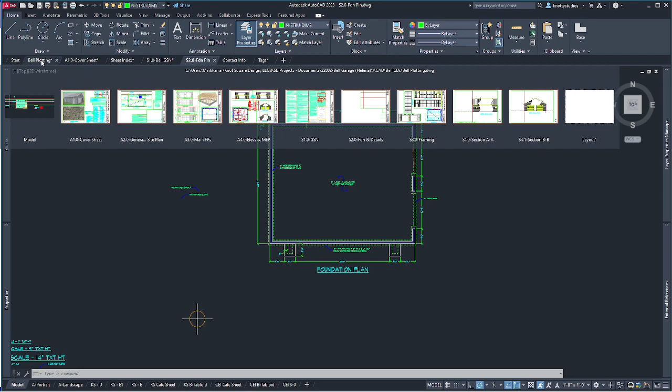Before we do that, I'd previously chosen a name that wasn't very good for this drawing. Instead of it just being called Foundation Plan, I added Foundation Plan and Details, but I separate Details into separate drawings that are then XREF'd into the plotting drawing. So I'm going back to my projects, to this particular project, to my AutoCAD file, then CDs, and did a save as. Now I have Foundation Plan, which is the one we want to keep, and this one called Foundation and Deets is junk, so I'm just going to toss it and clean things up a little.

Office loves to tell me that I'm throwing away stuff.

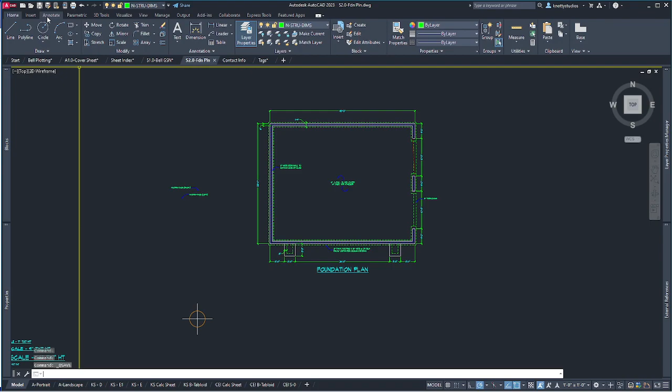So now I've got to get this into this plotting drawing. Before I do anything, let's make sure we save the latest version. Go into plotting. Once we're in plotting, we've got a few different things here, and Foundation and Deets — that's kind of how I came up with the name for the drawing — and that was just a mistake on my part.

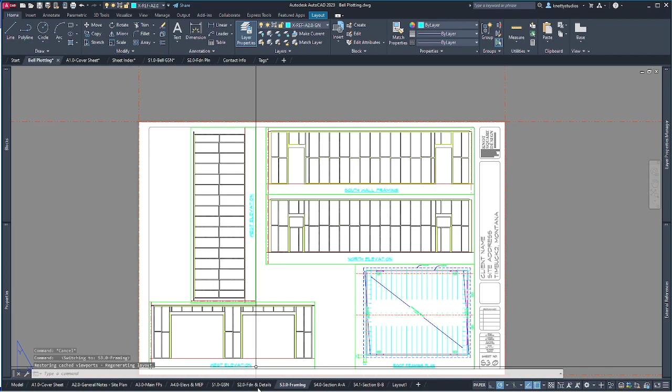We're going to go into that drawing. We already have a framing plan sitting here, but there was plenty of room, so we've got a framing drawing with framing of the walls, and we're going to do some rearranging because on our main floor plan I have those walls much nicer, dimensioned out, everything's ready to go. So the floor plan, three-dimensional image of it, all that kind of stuff is here.

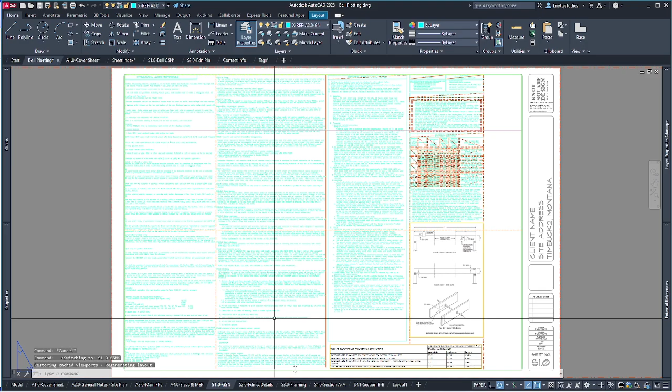Here we'll find out what fits and then start eliminating stuff. Our GSN is full — that's our general structural notes — so that sheet is full.

The way that I do this, I have a block, so to keep my client anonymous — which I didn't in some of my first videos — I changed the name to just leave it blank, and that's just in one drawing, so it'll fix all these in one shot when I'm ready.

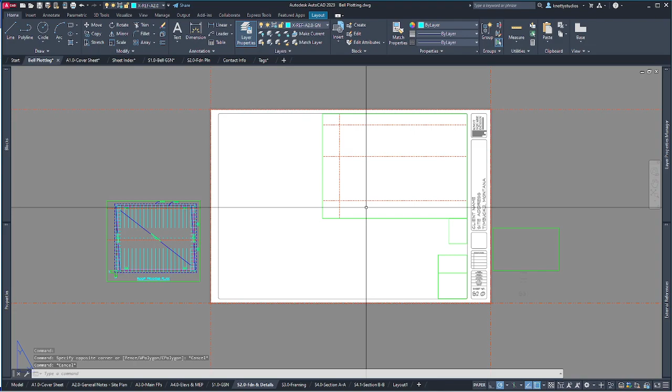So we're on S2, and we need to see what we've got going on for layer sets in this. I'm going to back out. Oh, and I know I haven't imported into this drawing.

Here I've got structural plans, and that plan we're seeing — you can see that blinking to the left there as I go over that line — that is in model space, and we need to put one next to it. That's the foundation plan, so we have to XREF that in.

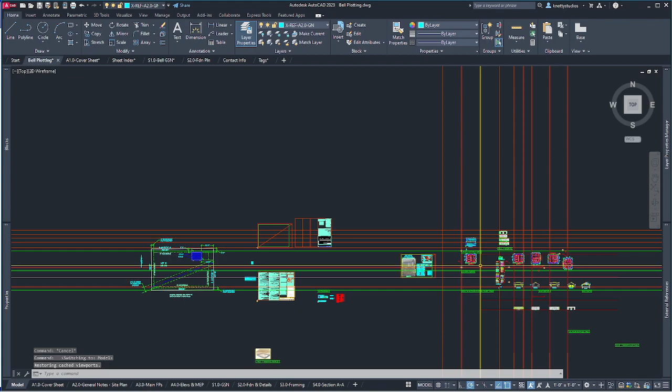First we need to make sure we're on the right layer, go to model space, go over to an area where I keep my structural plans. All these red lines don't print, so they're of no consequence — they just kind of help me line things up.

Let's see what we're on — we're on the general notes. So we want to be on an XREF for the foundation, and that is this guy here. I'm going to type XREF — oops, I didn't quite get it, but it got it anyway. Or no, looks like I did, I just didn't think I hit it.

And then I'm going to add one. Make sure I don't have that S2 in here from that other erroneous one. We should have this Rob.

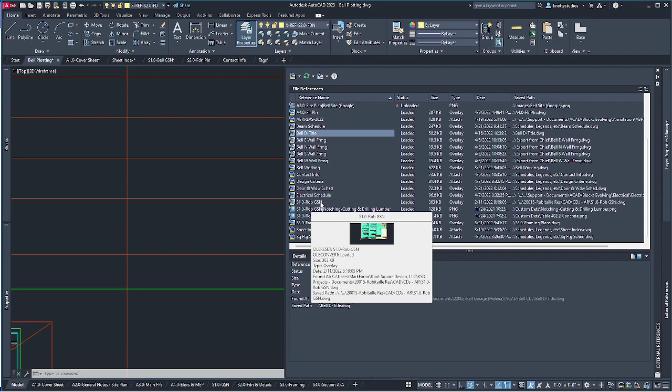That's just a name — I think I explained that in another video — but these are from a previous job, and we'll start using this convention of having the client name in certain types of objects, such as general notes, that sort of thing. Specific to its own, yes, that works fine. That helps me identify that I'm in the right job.

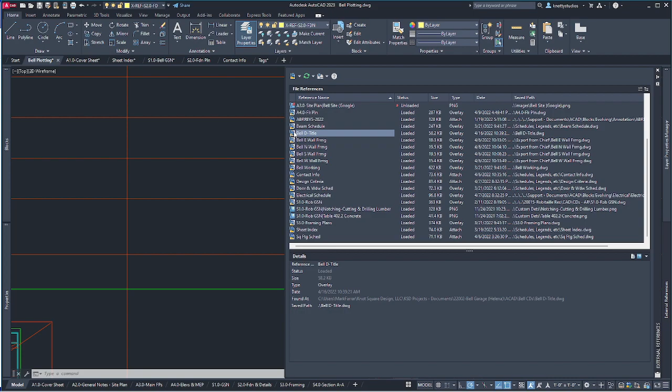So in here I need to attach — I'm on the right layer. All the stuff's going to show up in my other window because I was recording on the other monitor yesterday, but I got some stuff figured out to where I can record on my main monitor now.

So I'm looking for that S2. There it is, open it up. And the scale is good, 1:1. The path is going to be relative. The reference type will be an overlay.

If you do an XREF into an XREF into an XREF, you do need to attach if you want it to show up when you go to plot. But overlays are better for, let's say, when you XREF a drawing into one drawing, and then you XREF that drawing back into the original drawing. The only way you can do that without getting what's called an infinite loop situation is to use the overlay.

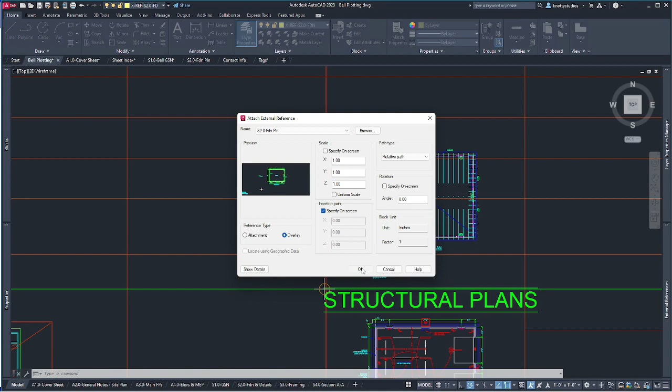My insertion point, I'm just going to pick that on the screen, because 0,0 is going to shoot off into space. And it's 1:1 on scale, inches, rotation angle, all that stuff's good. So here it is, and I'll just drop it in here.

Good enough place, and I've got some extraneous material. This is all part of it, all this stuff way out here.

So to make that go away, I type XC for an X-reference clip, pick the X-reference, go through, space bars because I do want a new boundary. I do want it to be rectangular, and that just sets me in the mode that last clicked.

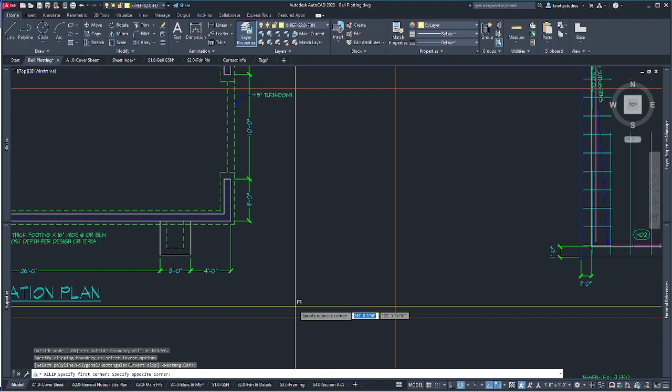So now I can just pick here, come down, make sure—see, I'm snapping over here when I'm getting close. So if I zoom in, so I can see this text up here and be able to tell where I'm at. If I get close enough, it shouldn't snap. Or I could turn my snaps off, but we're going to just get close enough.

And now you can see it's all cleaned up. That's as big as it is. And if I needed to change it, I can actually grab these little guys and resize it.

So now that that's in there, I can go back to this sheet that we were building. I can pan—oh, first I got to get into this viewport. That makes it line thick. Hit pan. That was a double click to get in.

Then bring it over, and it's grabbing that. That's pretty close to centered enough to where I think it's going to work. You can't get out of here unless you get out of pan. And this is just one of those commands in AutoCAD. Oh, it looks like I can go up here, but I'm still stuck in pan.

So you have to escape, get yourself out of pan. Now you can double click out of here, but I don't want to yet because I need to change the scale to 1/4 inch equals 1 foot. So there's my scale, it's going to bring it in.

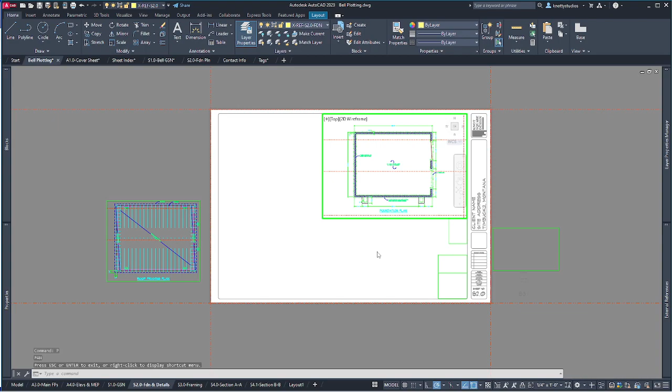Now I can go back to pan again. Let's bring it somewhere towards the middle. That's good enough. Double click out, and now I can size this viewport so that it easily just makes it something I can scooch around on the drawing until I'm happy with the way it lays out with all the other drawings that are going to be on the same sheet.

So there's that. I've got these down here. They probably have different layer settings because you can set layers to print differently in different viewports. So I'm going to keep them because they're probably to do with details. And eventually, as it says, foundation and details—this may end up on a different sheet.

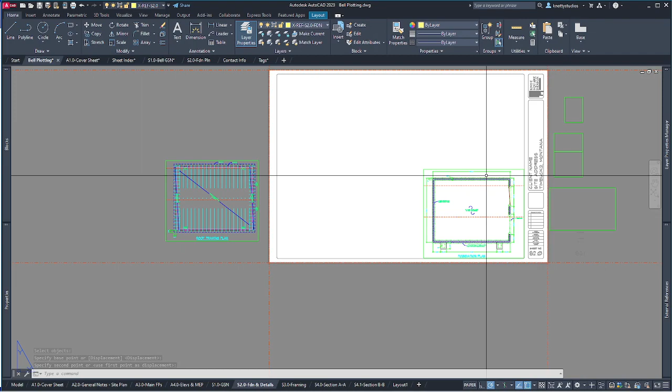We shall see. So now I'm going to move this. I like to move it down towards the right-hand side because this is my staple edge, and this is the important information the contractor wants to see right away. I try and keep it over on this side.

For the moment, I don't see why we don't—there's going to be so few details in this plan. Why don't I stick this up here? And let's get the framing in here too. And maybe we'll just rename this drawing when we're all done. And I'm going to bring it up, separate it a little bit.

So now I have my roof framing. If I want to, I can actually create some lines through here. And I can do it in paper space, or I could do it in model space. I'll show you the difference. So let's go back to model.

And I can even copy one of these lines, or I can create another one. So let's go to the G-LABEL/JUNK. Any of the G layers are just for our reference—they won't print.

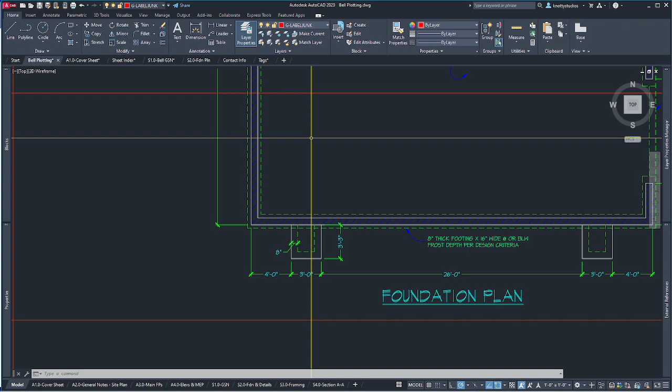So I'm going to do an X line, which is an infinite length. I'm going to do one vertically, so V, and then drop it on what I call the baseline, over here on the outside of the framing. Those are the same point in the stack exactly.

So now that that's there, let's save, then let's go back to that sheet. Oh, I got some unreconciled layers. There is a VISRETAIN setting that can help reduce how often you see that, but it won't make it go away. It's set to 1, because I brought in a new xref, and 1 is the value you want. That retains the visual context of your viewports, I believe, and you can double check me on that.

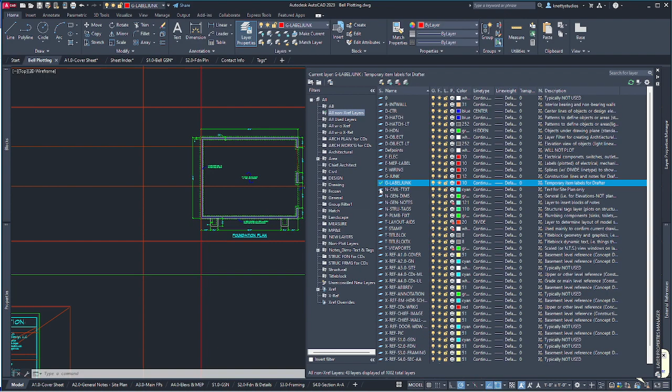So going into, what was I doing? Oh, I want to come down here and we're going to get things lined up. So foundation and deets, might be called foundation framing and deets. Let's line these up so they look nice.

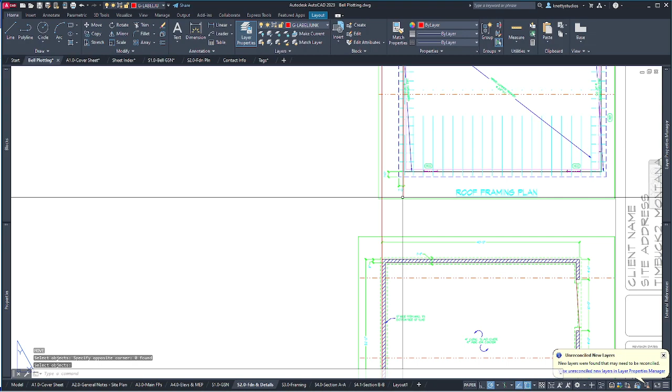And I can put another X line in here and do vertically, and it will snap to this guy. So now I've got this one here. So we're going to move this from, zoom in, let's get that, and go straight across. I can either let it snap to there, or I can type the word PER, perpendicular, hit enter, and it'll give me a little perpendicular symbol, so now I know I got it perpendicular.

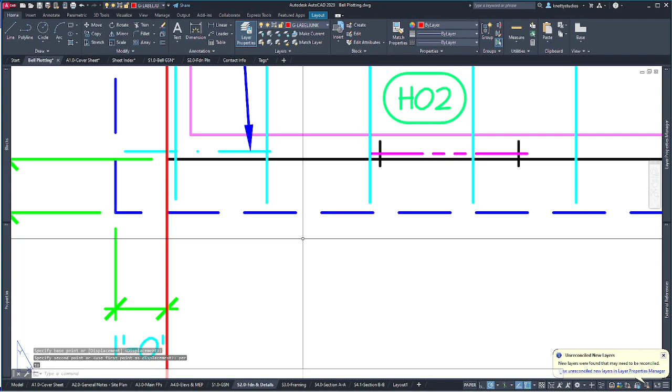So there's two ways to do that. Get rid of that line. These lines won't print, I could leave them there, or I can get rid of them, it doesn't matter. So they're inconsequential to what's going on.

So now we need to get some details in here and stuff. So that is assembling this drawing so far. Need some pretty standard details for this thing. So I'm going to zoom extend just to make it a little bigger.

Let's move one of these guys in here and see what kind of layer setup it is. I'm going to make it nice and big to start with, because that makes it easy to figure out where I'm at. Then I can double click inside of it. Oop, didn't get it, there we go. And then zoom out, and let's just take a look around.

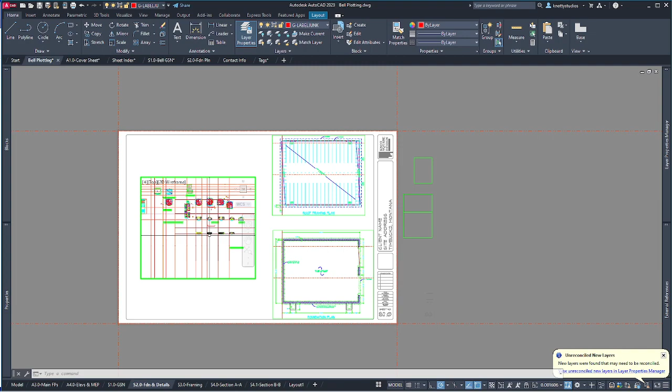Do I have any details in here already? I don't think I do. There's a section drawing, we'll need a section, so I've already drawn that. We've got elevations drawn, there's those framing plans. So I'm not seeing details yet.

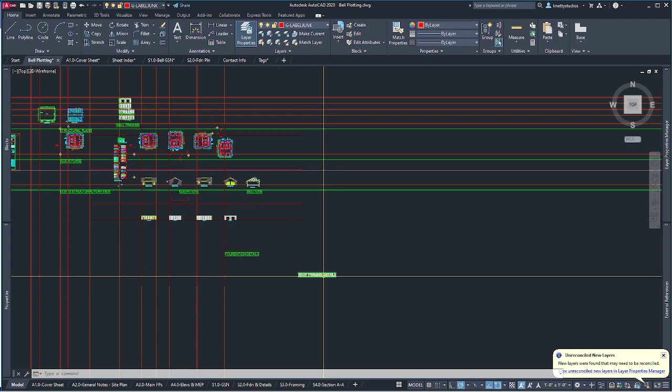So let's go in here and find our detail section in model space. And if I haven't positioned it yet, yeah, there's foundation and framing. They're just kind of floating in space because I didn't put them someplace that's easier to find. I do like to keep things kind of gathered together if I can.

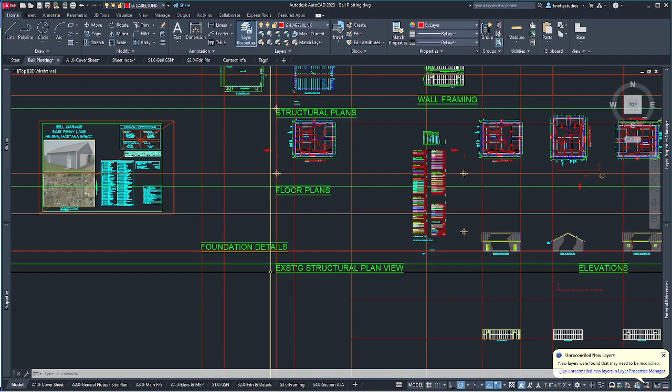So let's move both of them because there's hardly any details for this baby. Whoops, that snapped, I got too close to this line, and so it went to its midpoint. That's over here. So we're just going to scoot on over, and you can do a relative move, so I'm picking a point in space and just relatively moving it over.

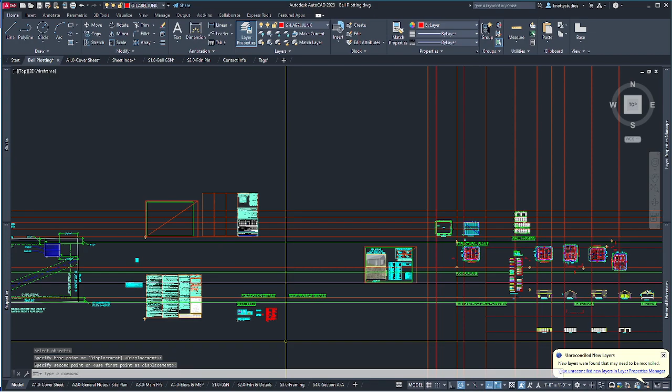Let's bring this guy up here. If I do the same thing, it'll put it on the same level, if I cared about that. I don't really, but roof framing details, actually really just have a connection detail because it's a truss, manufactured truss system for this little guy.

So in our foundation details, we now need to go out and bring some in, but we got to set our layer to what layer we want them on. So xref deets 1, 1 is usually where we put foundations, and deets 2 is usually where we put framing details. So you don't need all these layers if you don't want to, but I just do it that way myself, personal preference.

That didn't look like it went to the right place. Went to our annotation deets. There we go. All right, so xref, and now I got to go find it. Oh, before we go find it, we need to bring this guy back over here.

Let's go see if we have anything. No, it's empty. So I have a library of details that I can derive from, let's leave that open.

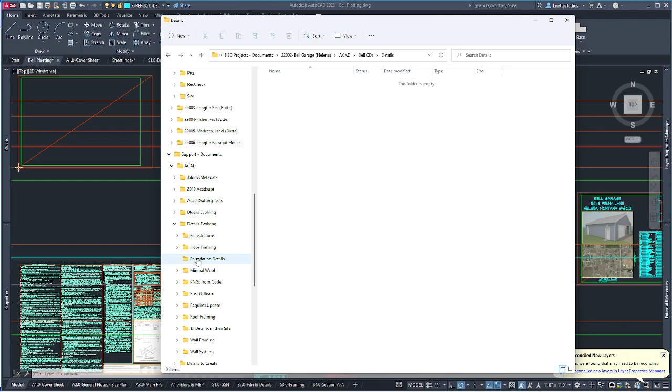It's under my support folder for AutoCAD, and I've got details that are evolving. So in our foundation details, got a bunch of different stuff here for retaining walls, concrete step detail, double 8-inch foundation at garage. That might be a good one, so we'll copy that and zip on up.

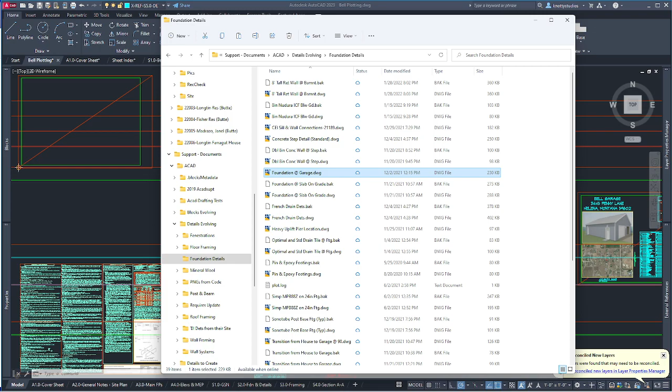I could open it, but I do this a lot. I'll bring this over here to show you how I try to make things more efficient, just have two of these open. I'll come in here, go to my details, and now I can copy. I don't like this new Windows 11 copy and paste, only a symbol, I like the word for some reason. I'll get used to it.

Foundation at slab on grade. I don't think we need that, but let's copy it in here so we can take a look at it. We can always delete it.

And paste. Then let's go to our framing details, roof framing. Column, common truss top plate connection, we'll want that one, copy and paste. So I've got some details in here to work with, let's start there. Let's go ahead and open this guy.

We do have a flat common truss, C elevation. These days I've actually been putting pretty much all my technical information on the sections. I don't like to have things repeated in a drawing, because if I ever have to go in and make a change, then I've got to change it everywhere, and if I miss it somewhere I'm going to get a call during the build asking which one is right. So there's a lot of reference to look at the section or look elsewhere for stuff.

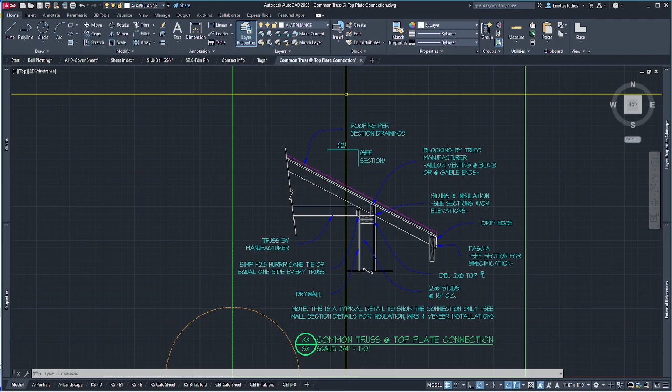We will need to give this a number once we have decided how everything lays out in our plan. So we got that one open. Let's look at this foundation at garage one. It's pretty straightforward too, see design criteria for the depth.

All of our wood products need to be 6 inches out of grade, that's a code standard. Over 7/16 minimum wood structural sheathing. Now this is a client who requested that I upgrade this to a 1/2 inch, and so that's special, that's why I make a copy.

And then I'll go in and make any changes to be particular to the project itself. It looks like everything here, there's a lot of 3/4 minus up here for the aggregate base course, just really easy to compact. A lot of red dirt in certain areas of the state that just compacts really well.

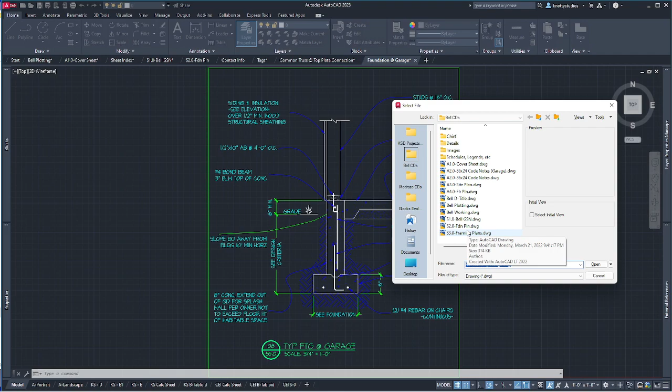This has a number in it already, so we'll need to make sure that we get that changed once we get it organized. Now let's pop open the other one just to see if it's useful. I don't think we need it, but I will need a turn down for that typical footing. Boy, this looks like the same detail.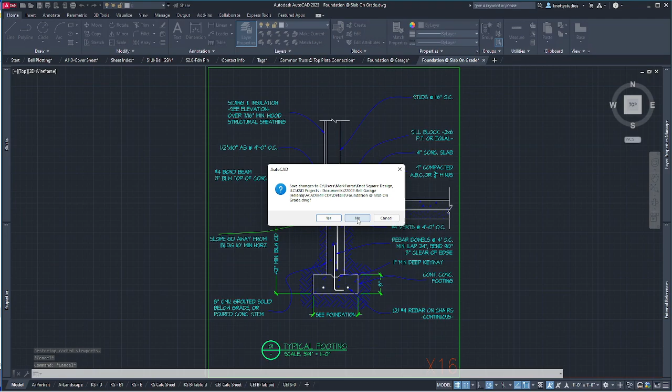Yeah, sure is, foundation is slab on grade. So this basically just, at one point I probably had a special case for a garage, so I gave one a name. There's no changes to be made, so we'll just need to turn down for the garage door. But let's put these in there just so we can show how this works.

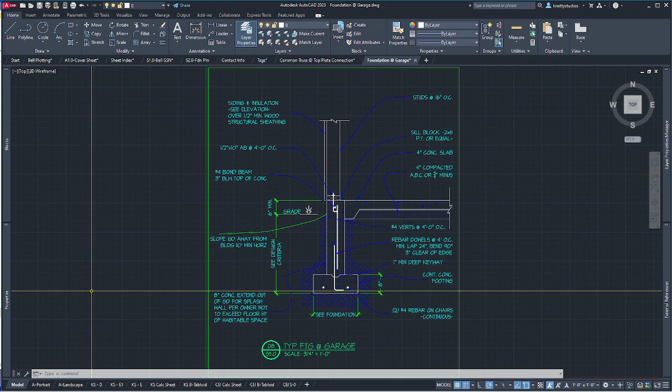And then move on, we'll need to do the whole project. So these are ready to go, I'll go into bell plotting again, and I've got those two saved. Let's come here and get rid of this one because we don't want it, we're not going to use it. These two are open right now.

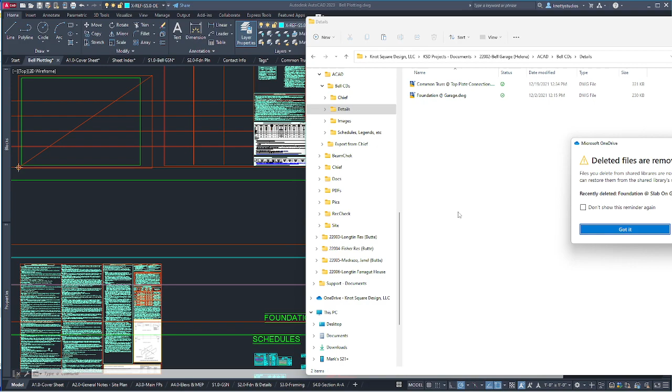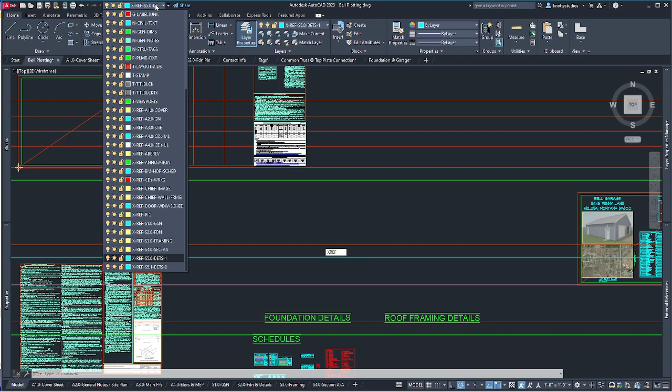Got it, I know, I'm erasing it. Now we're going to come in and pull these two in, one in the foundation, one in the roof framing. I've got more to do, but this will be good enough to get us through how. So XREF, oh yeah, we're on, let's see which one, D1. So let's do the foundation, so XREF.

We want to hit attach, go to our folder for details, our foundation. Open it up. Okay, all our settings are the same. See how small it is? It's because it's a 3/4 inch scale.

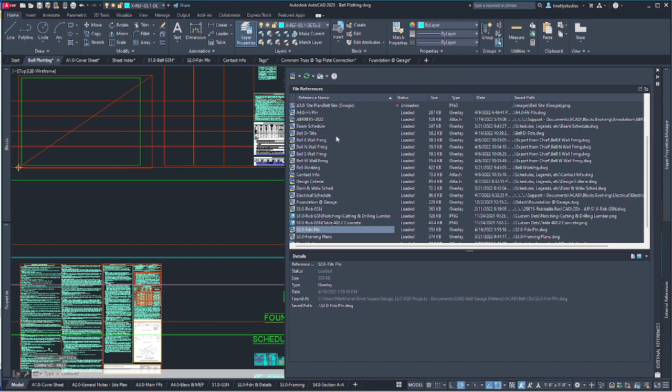Now we can do the exact same command. Oh hold on, I want to change my layer. Don't forget to change your layers if you're that type of personality and like to have that. So XREF and attach, common, open, and drop it in there.

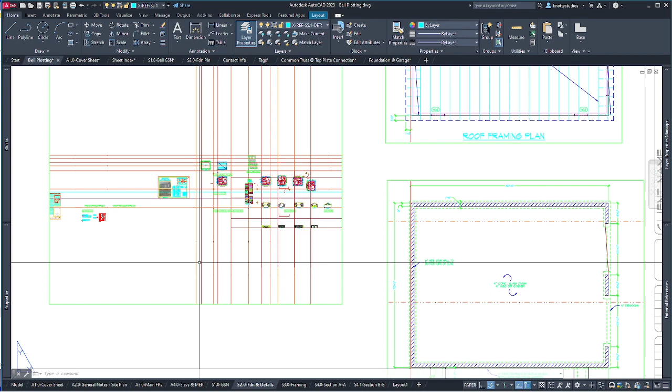Now all I got to do is go back to my foundation and deets, and I can make two of these, but let's get in a little closer. Okay, so what have I got here? They are hidden somewhere. Oh, first off, no, they'll be here. They'll be here.

Where? They're super tiny. Oh look at that. They're not showing up in here, and I have a feeling that's because this setting is probably not in here. Let's do one just to show you how that works.

So we'll come in here and go over to our layers. Let's go into layers for this particular viewport is what we're looking at. So in here there's some things where the viewports are frozen.

So there's some general note stuff that's frozen in here. That didn't turn on, looking for that to pop up. So I'm going to kind of look down towards the bottom. XREF, and I can't read these. Let's make it wider.

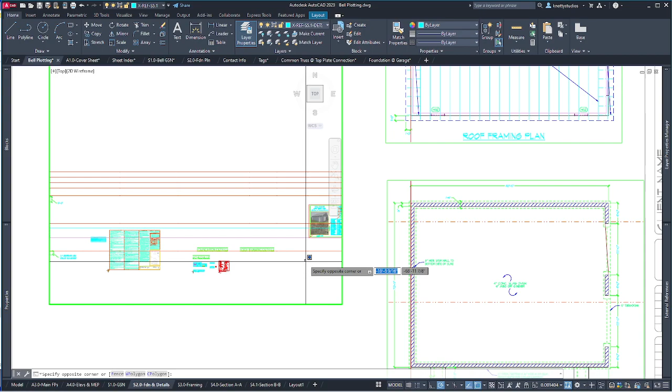Come on, some of these are hard to grab. Then, oh, these have to be done at the top. Then bring it back. Oh man, somebody snapped something over there, so it didn't want to do anything.

There we go. Now what's turned off here? Abbreviations and annotation, don't know why. GN, that shouldn't be causing it. Sometimes these can be a little mysterious, but they can also be hidden in here.

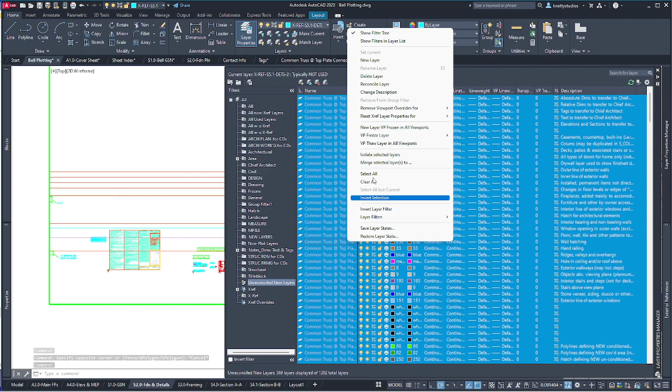Oh, and unreconciled layers again. So let's go in here, Control A, reconcile the layers. These are new things I brought in, so you are going to have to do it then. Now I don't see a foundation detail there yet, so I still got an issue.

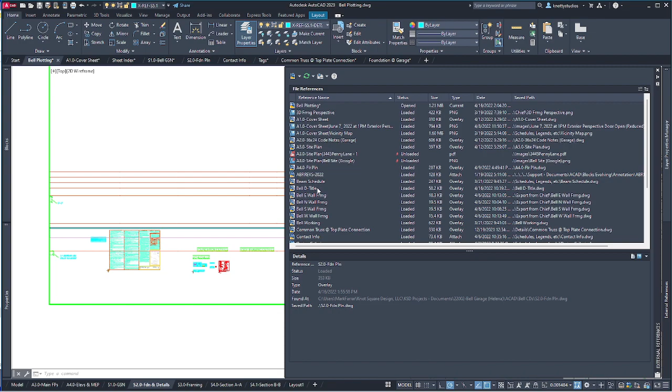And it's determining what exactly that issue is. So let's make sure they're here. Foundation at garage, that's in here, it's loaded. Okay, so the XREFs are here. So now I just got to find out what is keeping them.

This is all my non-XREF layers. So Breeze is frozen out of there. Check sometimes over here for your new ones too. Then I can go to my XREFs. Let's just check those. Breeze, annotation, and GN.

It's not on those layers. It's on these two layers. They're both fine. So let's check the layers themselves. So if I come in here, I'll see this foundation plan.

And this is, oh, that's foundation plan. I want that detail for a foundation. Foundation at garage, how does this look? Oh, my junk layers are probably those. Yep, the junk layers don't print.

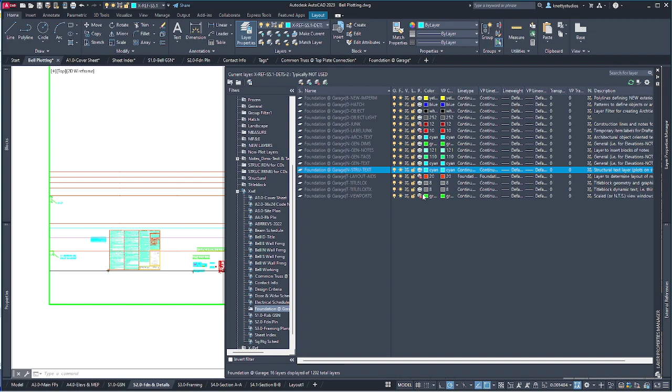Don't want them to print. Don't want my layout aids to print. I don't want my viewports to print. I'm at a little bit of a loss here, but it is solvable.

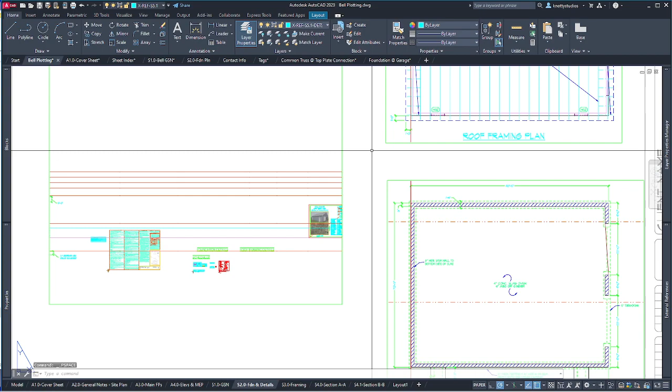Sometimes it's an XREF into an XREF. What else could it be? But let's try something else, just because I don't want this video to be too long. Oh, here's my extraneous stuff.

This is just a product of creating a new sheet. Okay, so let's do this. Zoom in here, and zoom extents. Now let's come in.

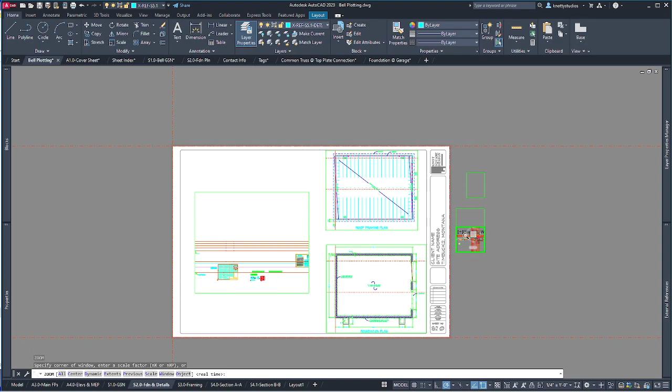I'm so far away, I need to get up closer. Nope, they're not there either. So even this is not set up for details. Something's up with this drawing. It's got to be another problem. It has to be another problem.

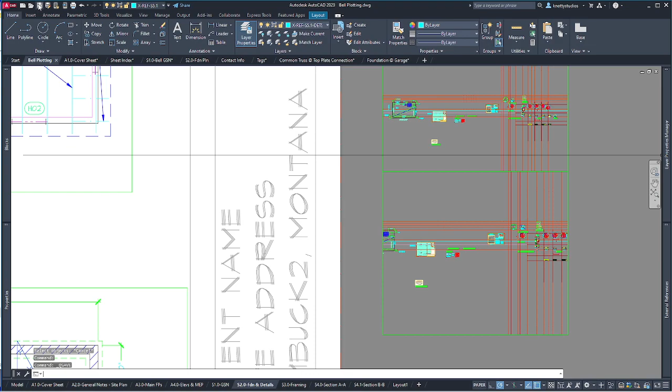Make sure we save. Can't imagine that would have anything to do with it.

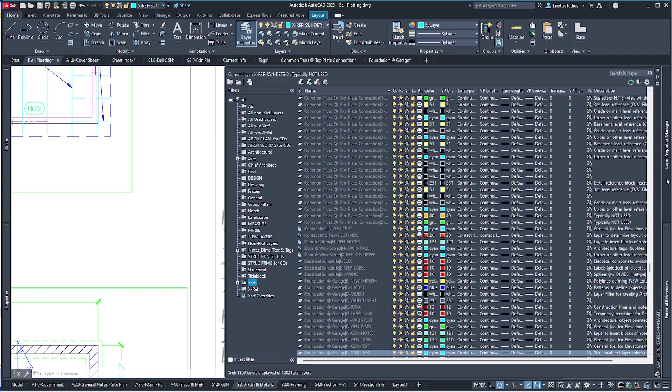What is causing it? I always figure these out rather than just pop into another one. It's kind of nice to always remind myself of how I get myself into these situations. But this is actually

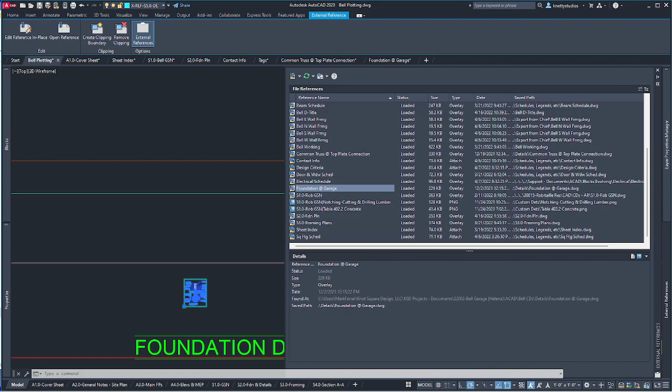just the plotting drawing. And in my paper space I can clearly see it. It is on this layer. That layer is not locked. It's not.

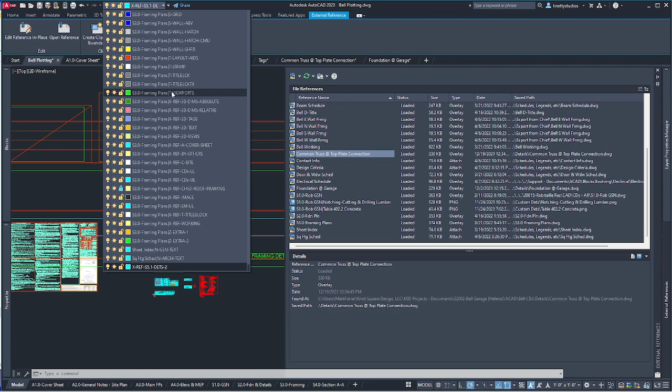Everything is fine there. And this should be on number 2, which is DETS-2. Everything looks good there. All these layers are because of the layer set that I'm in. So that's here, I am actually in a layer set through here. So I can look at it just like we did earlier. We looked at the foundation. Everything looks fine.

Just for the fun of it, we're going to look at this framing, common truss. What layers are in common truss? Shouldn't be many.

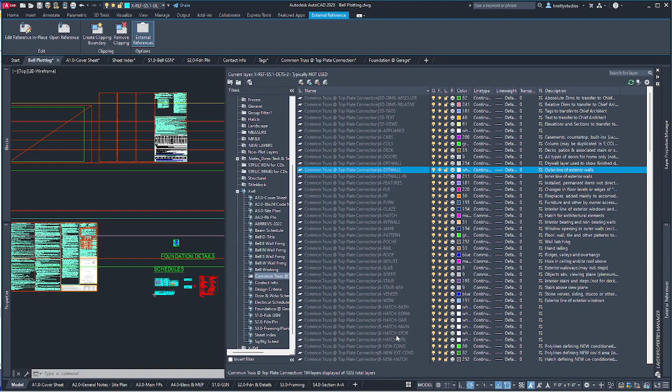Looks like it's got a full set of layers, so that file needs to be purged. Yeah, that is way too many layers. So we'll go through and clean that up. We want to see this clean up. Let's do that real quick because it's just so easy to do.

So if I look at this thing, there's appliances, there's all sorts of stuff in here. This is just a detail. I don't like having all that junk in just a detail. So we're going to type purge, and in details, I'm really not afraid to just say purge it all.

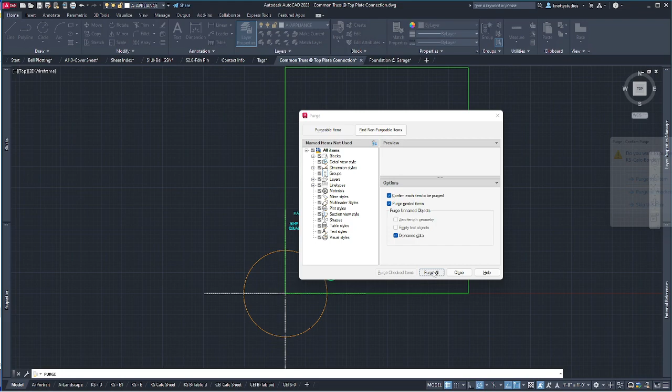You want to get your nested items and your orphan data. Purge all, it'll clean the heck out of it. Purge all checked items, close. And now, oh, the appliance layer, I was on it, so it didn't get rid of it.

So I need to switch to the 0 layer. If I type purge again, the only thing that should be left is that appliance layer. Purge all, close. So this is about as minimalistic as I can get.

There is more I could do. I can get rid of all these down here because there's stuff on layers, but I usually don't worry too much about that. There are reasons to really clean something up, but this isn't one of them.

So now that that's done, I will hit save. I should try my best to remember to go back into my original, that's in my set of details, and get that one in here.

So I'm going to pause this video and figure out what's going on and then come back. Or actually, before I do that, let's take a real quick look at the plotting sheet because I want you to see that some XREFs were modified. So now I updated that. I'll hit save.

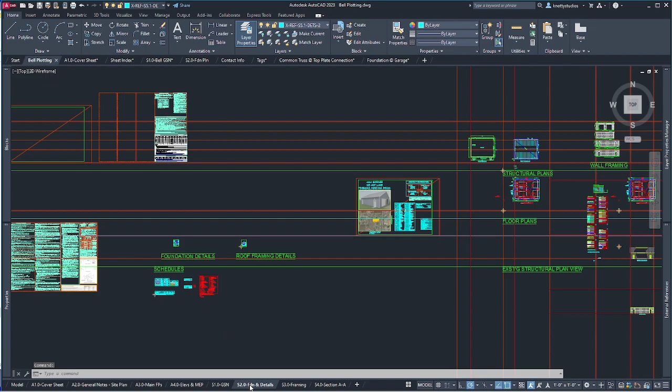They're there in paper space. They're still probably not going to be here in this other sheet. Sorry, other sheet. Oh, I got one. So let's get that one in here real quick.

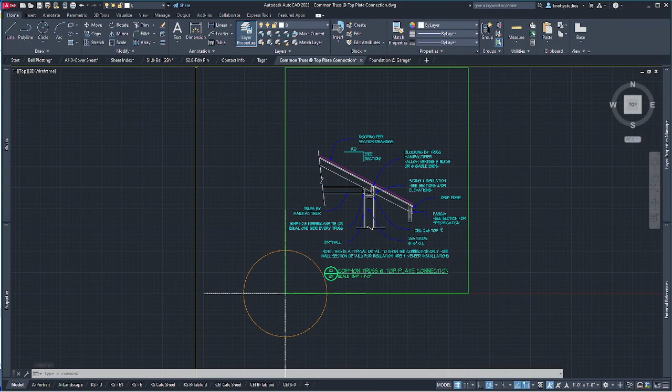That may be enough to actually wrap up the video, but I will hit pause anyway for those who want to see what exactly was wrong. Why did I go out of the drawing? All right, trying to do too many things here.

So let's zoom in on this guy. I'm trying to center that a little bit better. Now I want to change it because I know it's at a 3/4 inch scale. 3/4 of an inch. Oop, went off screen so I can hit my pan. Try and find it. There it is. Easy enough. Oops, hit escape.

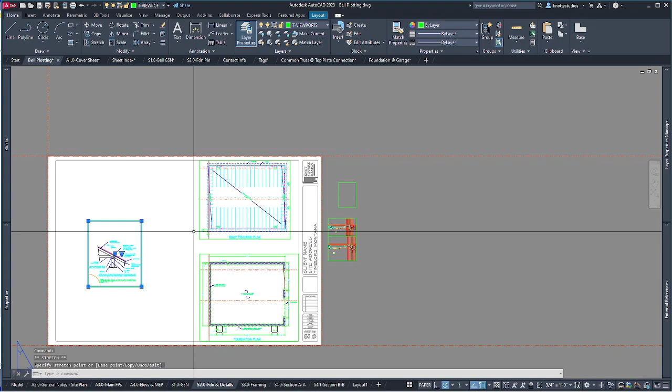That's the one thing about using pan. And then I can bring that up to that edge, this to that edge, and I have a detail. So now you can grab it by this center piece too and move it around if you want. That's one easy way to do it.

So we'll drop it up here for now, and it'll print just fine. So now I am going to pause the video, and I'm going to work with one of these guys. Bring it over here in paper space where it's a little easier to see. Make it larger. Try and zoom in on it.

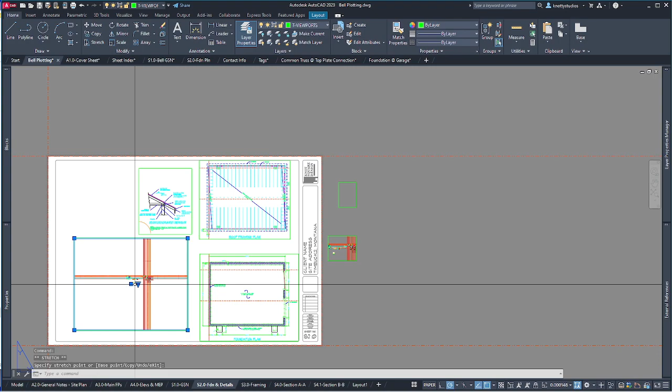Oh, look, there it is. Okay, everything's working. So somewhere along the lines, purging and cleaning the files seemed to be the trick. Can't tell you exactly what I did, unfortunately.

So let's bring it up to scale. And I just apparently wasn't in it, so I'm going to undo. I was not in it. So double click. Now let's bring it to scale.

And we want 3/4. Boom. Now we can pan it, try and find it. See how lucky we get. Not very. So I'm going to back out.

Bring it over, try and get it more centered. Now let's try hitting that to scale. I did have to escape to get out. 3/4. Boom, that's closer. Now I can pan it, bring it over, call it good.

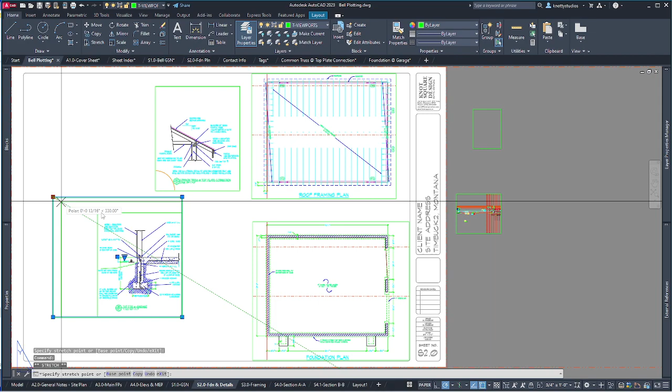Double click outside, and let's size this. See those borders? Move it where I want it. I got more to put on this sheet, obviously, got some space, so got the other detail for going through here.

And I've got a sill plate detail to add to this, that sort of thing. So, but it's looking pretty good. So that's enough for right now.